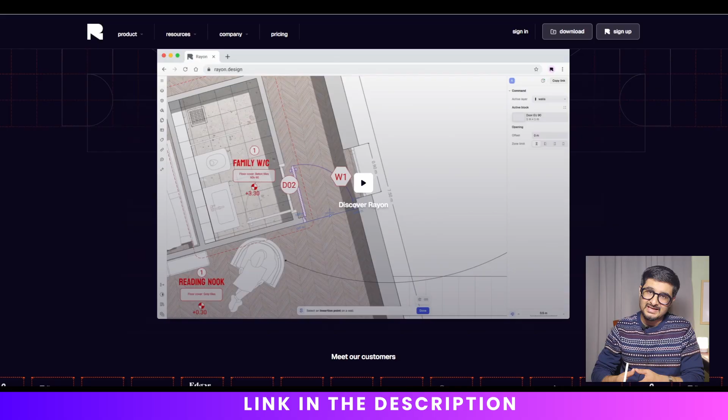Let me highlight some of the BIM 2.0 tools for interior designers. Starting with number one, Rayon Design. Browser-based collaborative CAD BIM tool for architects and interior designers, enabling real-time 2D floor plans, sections, mood boards, AI assets, and drawing export for efficient project workflows.

Number two, Snaptrude. Again, an AI-powered browser platform generating your BIM models. There are features that enable text prompts with real-time collaboration, code analysis, and instant renders for early-stage concept design.

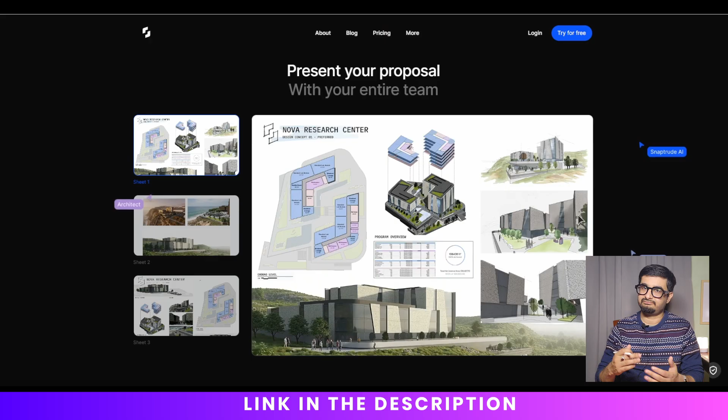Number three is Spatio.ai, which is space planning software generating optimized layouts, furniture arrangements, and 3D visualization from room scans or prompts for efficient commercial, residential, all kinds of projects.

Number four, Qonic. Again, a browser-based collaborative platform for design professionals, enabling real-time 3D modeling, BIM workflows, parametric components, and seamless team sharing without any software installation.

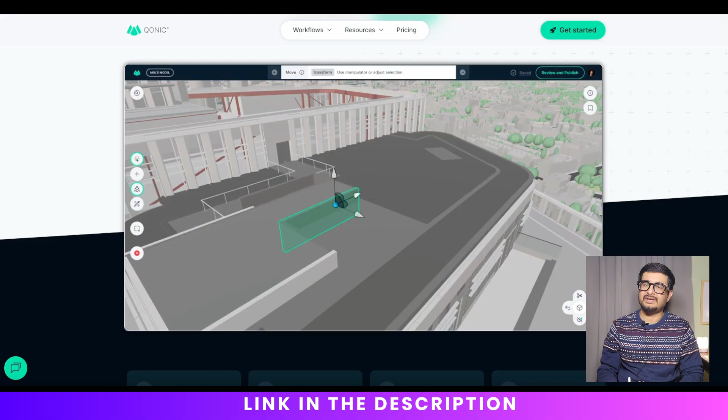And the last one that I'd like to mention is Hypar.io, a cloud-based automation-first building design platform that generates parametric models using modular functions. It enables rapid rule-driven layouts, multidisciplinary coordination, and data-rich BIM output without traditional manual modeling.

These tools are flexible, lightweight, cloud-based, easier to adopt, more AI integrated, cost-effective, and honestly perfect for interior design workflows in 2025 and beyond.

So, is BIM really necessary for interior design? Here's the honest summary. BIM is not mandatory for small interiors. BIM adds significant value in large and complex interiors. If your work involves repeated or multi-location interior projects, then BIM becomes a scaling tool.

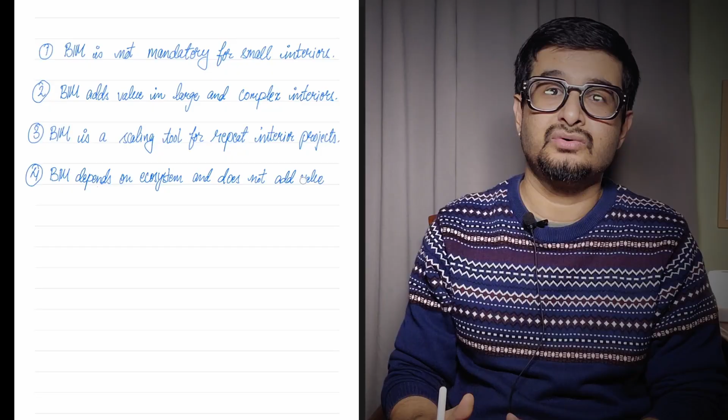BIM depends heavily on the ecosystem. BIM does not add significant value when you work in isolation. BIM does not restrict creativity. You don't need full BIM. BIM-Lite and BIM 2.0 tools exist.

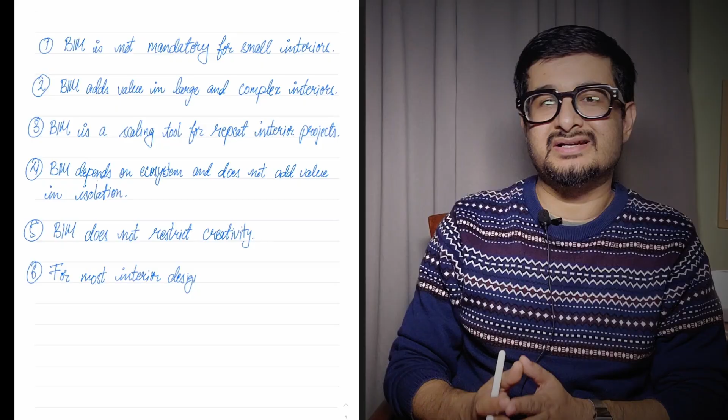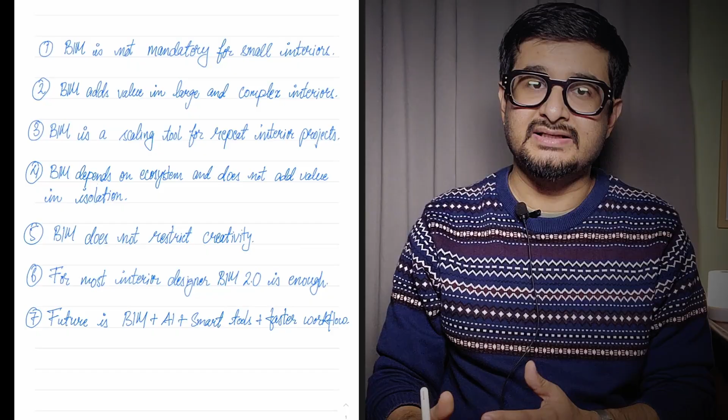For most interior design firms, BIM 2.0 is more than enough. And the future may not be just BIM. It's AI plus smart tools plus faster workflows. Interior designers must choose the tools that match their project type, team size, creativity, and future goals, instead of following trends blindly.